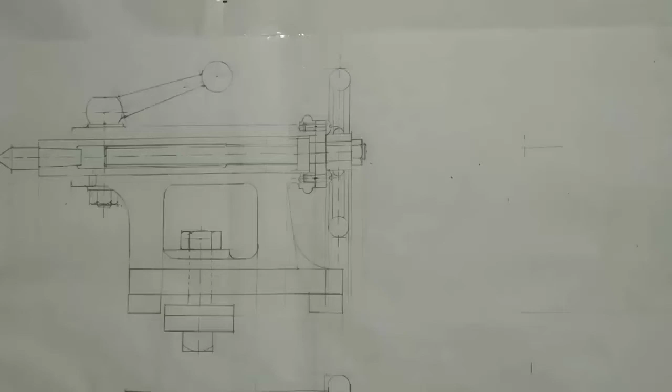Then we have to draw the side view. Extend this center line.

First we shall draw the side view of the body. You can see two circles of diameter 38 and 62. So half of 38 is 19. Look for 19 diameter circle. Here it is.

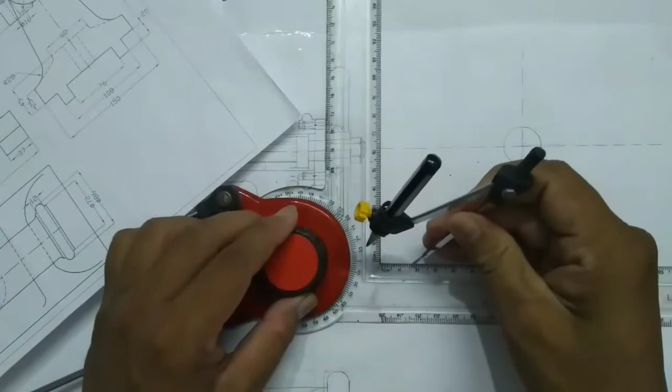Another circle is of diameter 62. So you have to draw for 31. If the diameter is 31, then radius will be 15.5. So I am measuring 15.5.

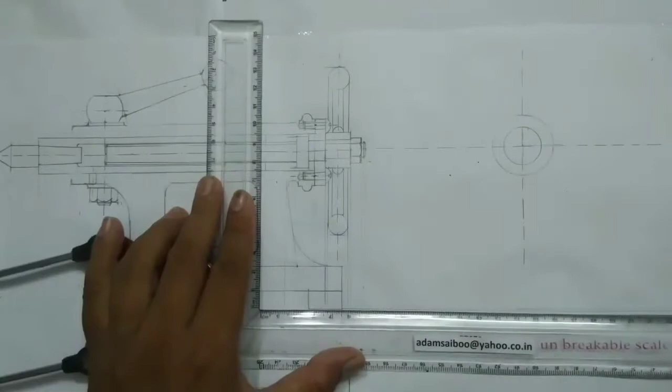Next thing we have to draw this base. Project line from the front view. This distance is 76, for us 38. If you further divide, you will get 19 mm. From here 19. From this point you mark 38 mm.

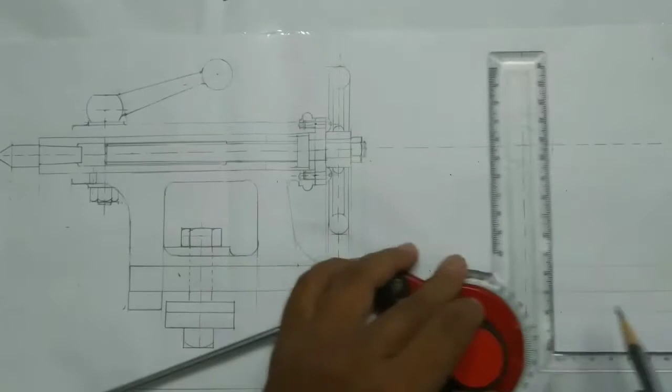And this distance, it was given 108, for us 54. If you further divide, you will get 27. So from here you mark 27. From here mark 54.

Then this distance 150, for us 75. If you divide further 37.5. From here 37.5. From this point you mark 75.

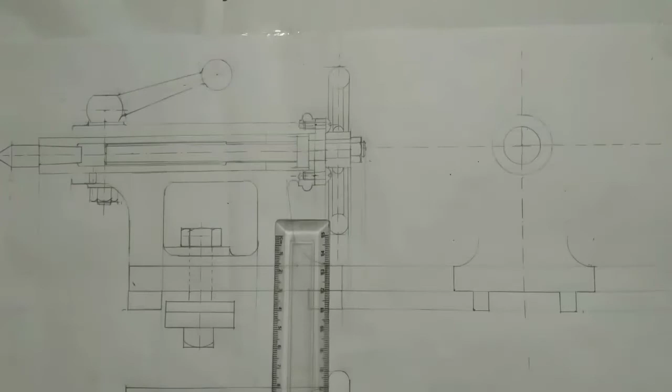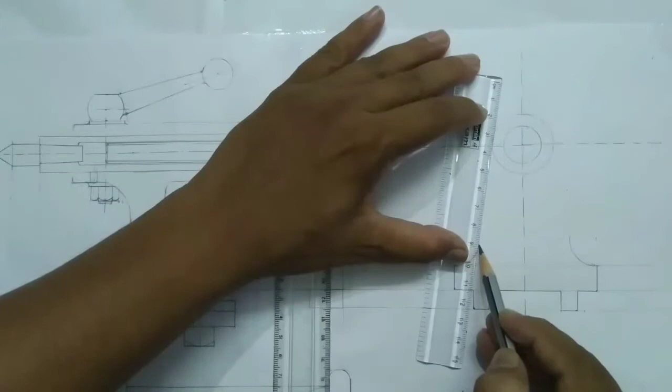Then you have to connect these two arcs using a line. It should be tangent to these two circles or arc. So you place your scale like this, just move here. When it touches the arc at this point, not at this point, at this point it is touching, it should be a tangent line. So draw a line, and also here.

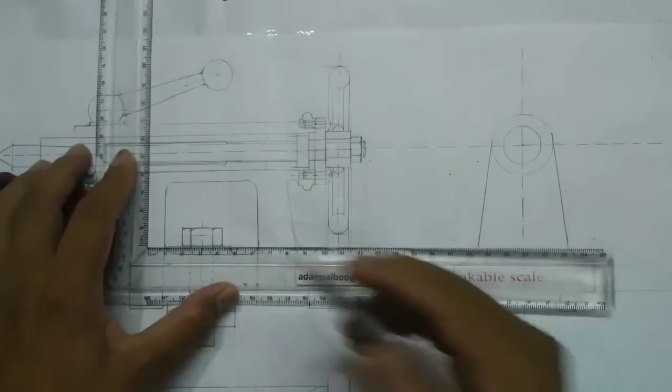So this is the tangent line. You can see the line is meeting at this point, not here. So this is the tangent point. Then you can see this line which is coming from this point. You have to project, and this point you have to draw line here. So I am projecting two lines from the front view, one from this point and another one from here.

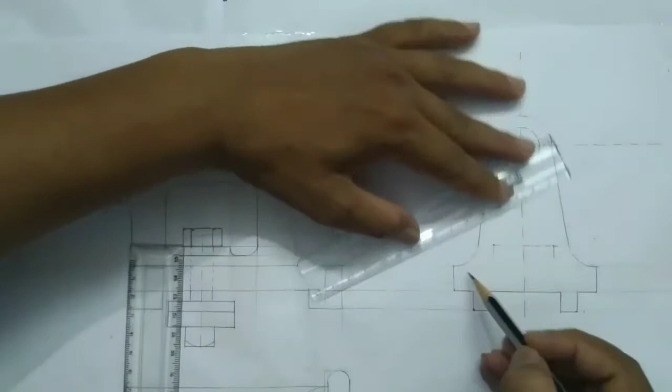You can see this distance was given 62, which should be equal to this distance 62. For us 31, if you divide 15.5, draw dashed lines. This one is also tangent to this arc, this line.

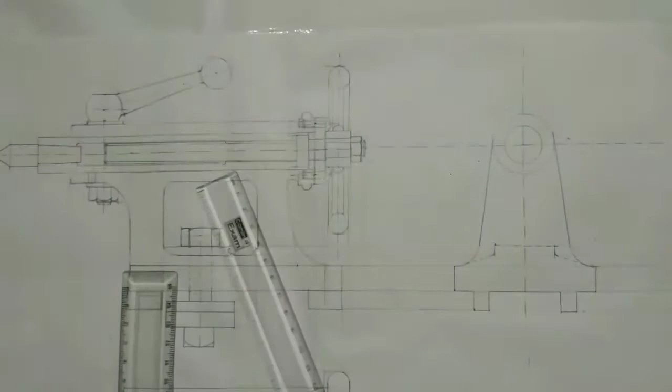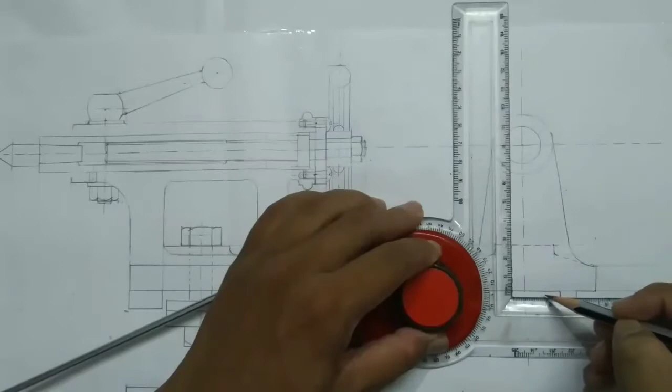Fillet this portion. I am using 6 mm diameter circle, or 5 mm. Then you can see a hole here. This one is of diameter 23. For us 11.5. Approximately this side 6 mm. So this distance should be 11.5.

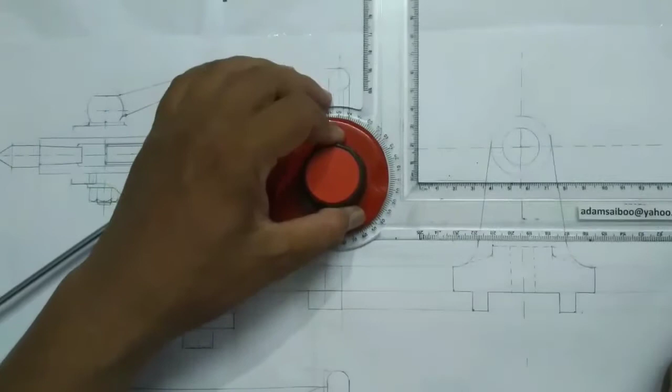Then the next thing is I have to draw this portion. This is of height 70. So from the center line you have to divide into 35, which means 17.5. Draw a rough line. From here you mark 35, draw a rough horizontal line.

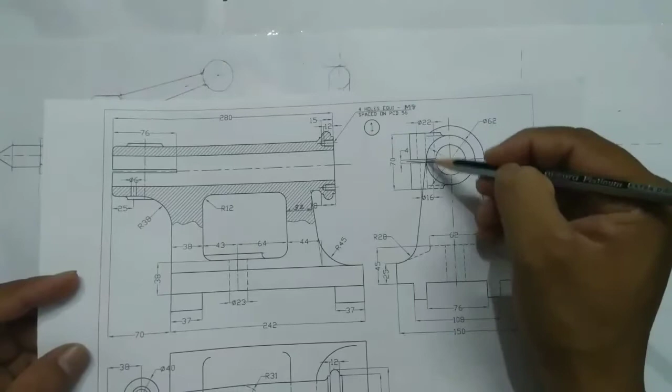Then you have to draw this center line, which will be tangent to this circle and also vertical, this center line. The next thing is I have to draw this line, which is a circle of diameter 40, for us 20. So divide 10, 10. From this point I am drawing a line of 10 mm gap.

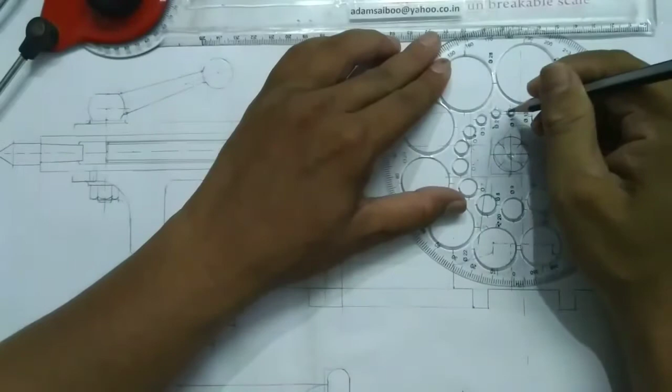Then draw horizontal line from this point up to the center line. And also you can see a small fillet here. I am using just 1 mm diameter circle. Next thing, you can see here a gap of 4 mm, for us 2, divide 1, 1.

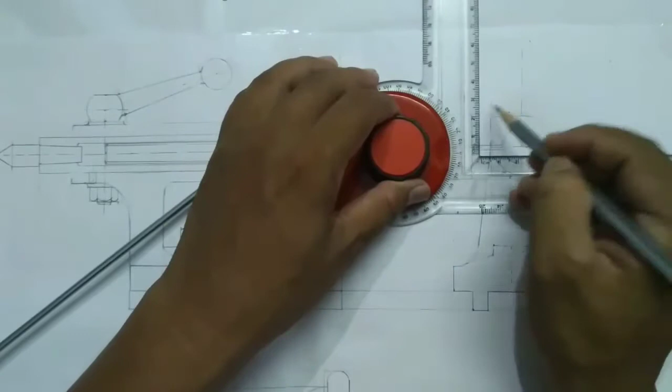And the next thing, they have drilled a hole of 22 mm diameter, which starts from here and ends here. For us 11, if you divide 5.5, 5.5. From the center line you mark 5.5 and draw a dotted line. From here you mark 11 mm.

And this side of the hole is of diameter 16. So you can see here dashed lines. 16 means 8 for us. So divide 4, 4. From this center line I am drawing a dashed line of gap 4 mm. From here you mark 8 mm.

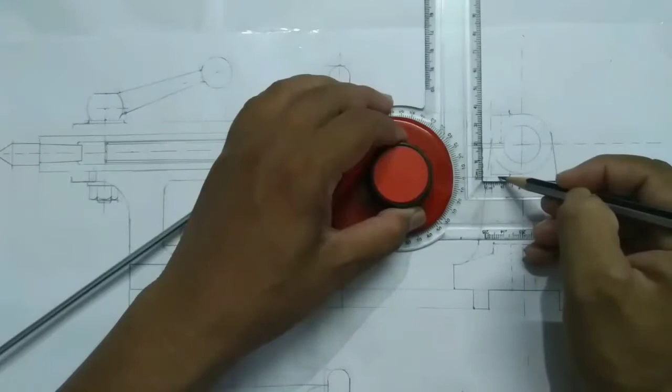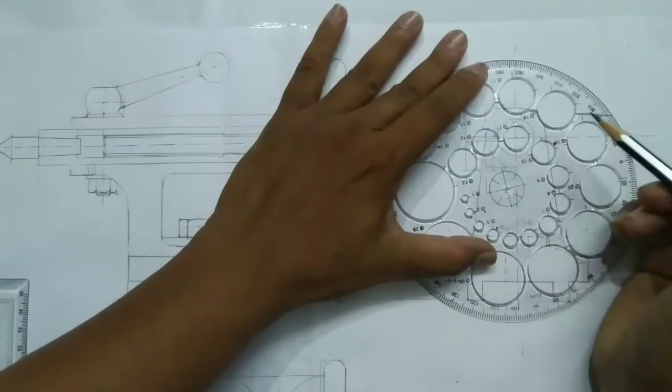Next, if you see from the side view, you can see this barrel here. So the major diameter of the barrel will coincide with this portion. I have to draw the side view of the center. So it will also be a circle. So we know that the circle diameter of the center is 22, for us 11. I am using 11 mm diameter circle. So this one is the center.

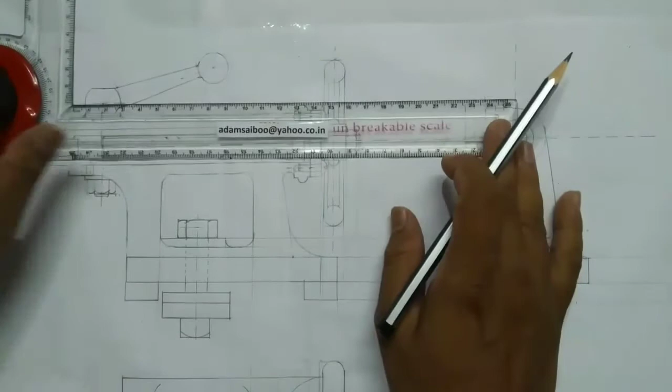Then I am going to draw this side of the handle. So I'm just projecting two lines from the center point of the circle.

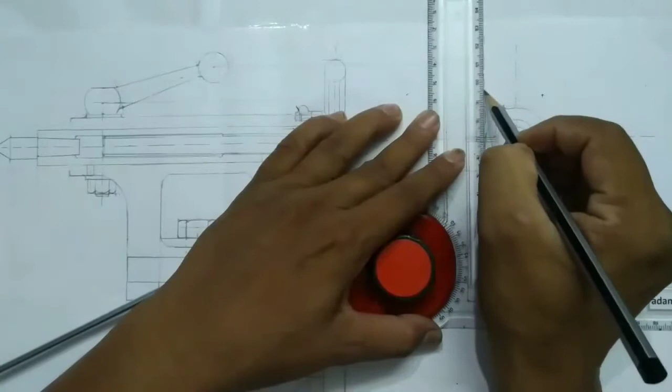Extend the center line. So this center point, we know that it is 11 mm. This distance is 11 mm. So for us it is 5.5. You just mark 5.5. So this circle diameter is 40, for us 20, and this one is 32, for us 16. Choose 20 mm diameter circle. Here it is.

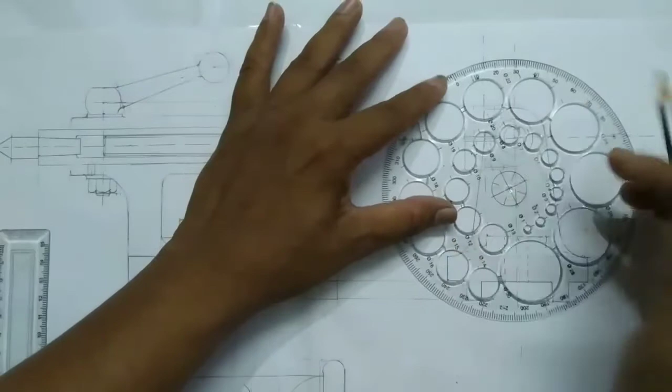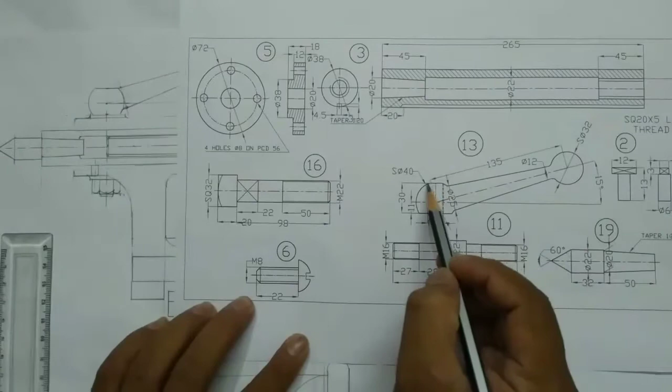Then choose 16 mm diameter circle. This one, 16 mm diameter circle. So this distance is 30. We just cut the top portion. For us 15. From here you mark 15 mm and draw a line.

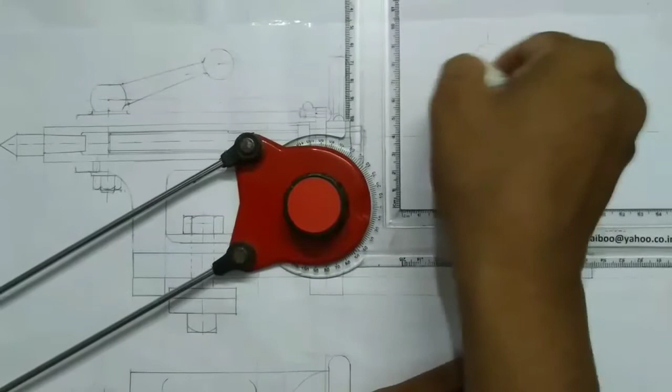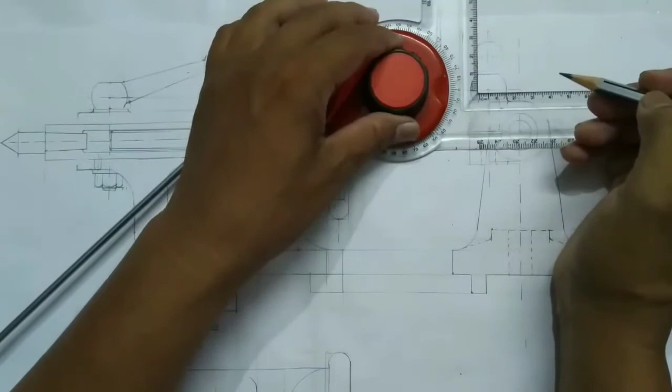Now the handle is tapered. So here the distance is given 12 mm. For us 6, so you mark 3, 3. This one 3, 3. Total 6. And here the thickness is 25. For us 12.5, so you can mark 6, 6. This total distance 12.5. Use ruler to join the line. Just fillet at the end.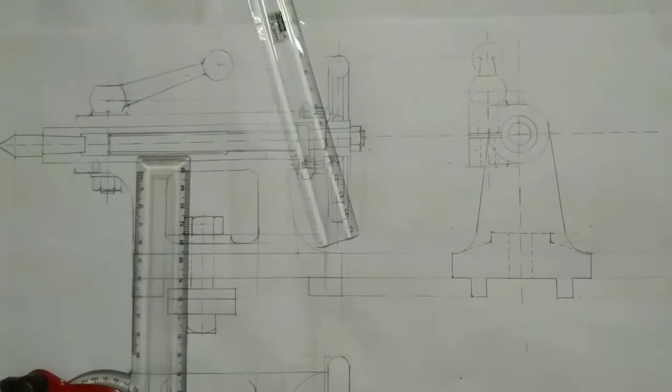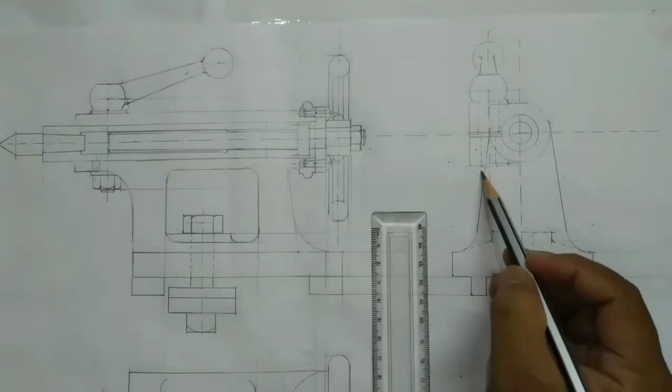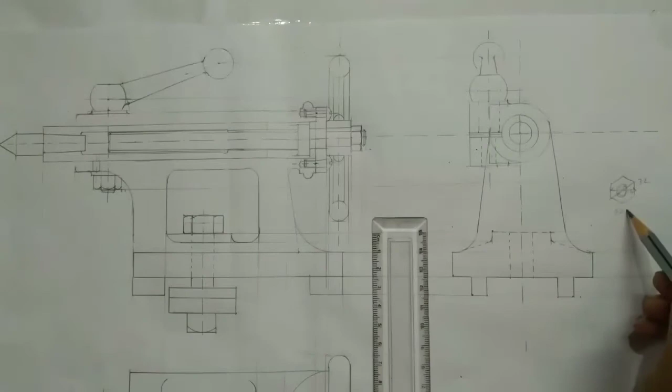Now this nut I have to draw here. Project line. It is a hexagonal nut of size M16. So M16 means this major diameter is 16. So total this distance will come around 32. Then we have to calculate this distance, which will be equal to 32 cos 30 degrees. So approximately we'll get 28 something. For us 14.

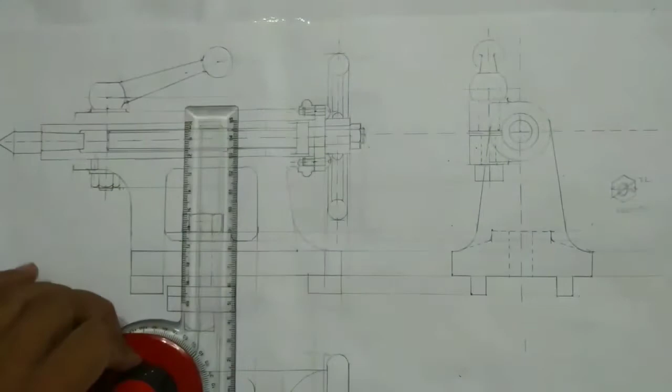I'm using a 12 mm diameter circle to chamfer the corners. Also I'm going to draw the side of the nut here. Actually it is invisible because it was hidden.

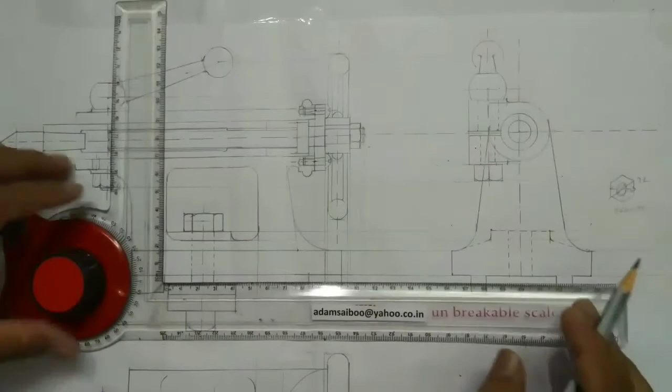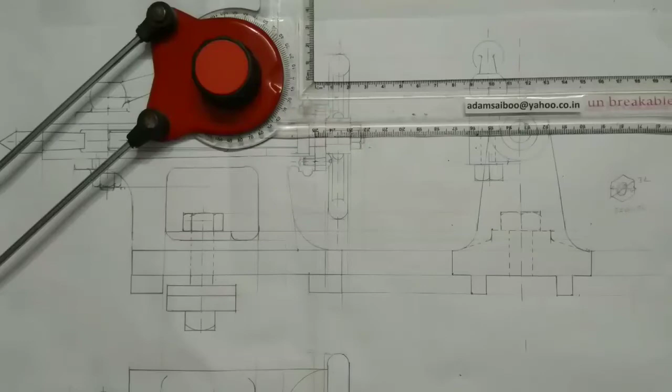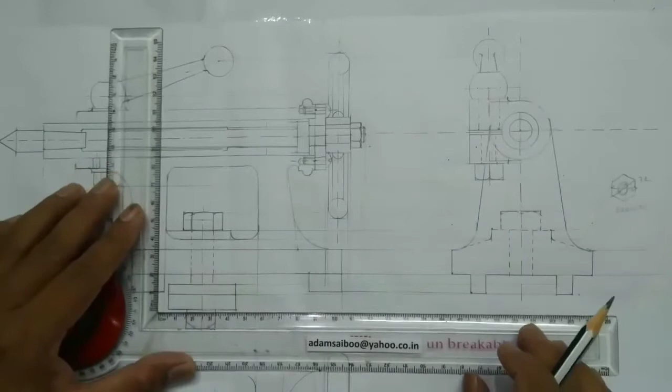Then the clamping plate. This one is a clamping plate. I have to draw the side view for this clamping plate. This distance was given 106. For us 53. 53, if you divide you will get 26.5. This portion will be hidden.

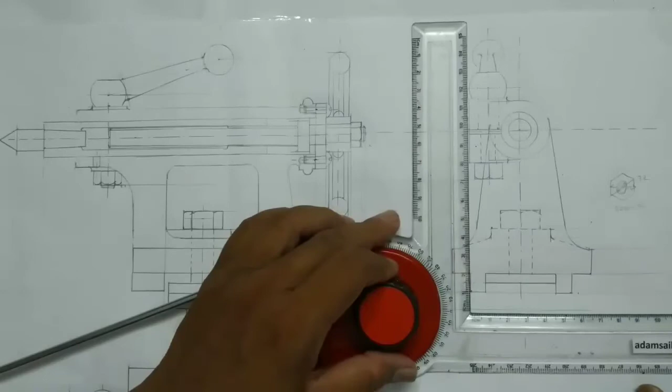And this distance was given 126. Half of this, 53. Sorry, 63. 63 if you divide, you will get 31.5. 31.5. 63. You can see a fillet here. I am using a 5 mm diameter circle.

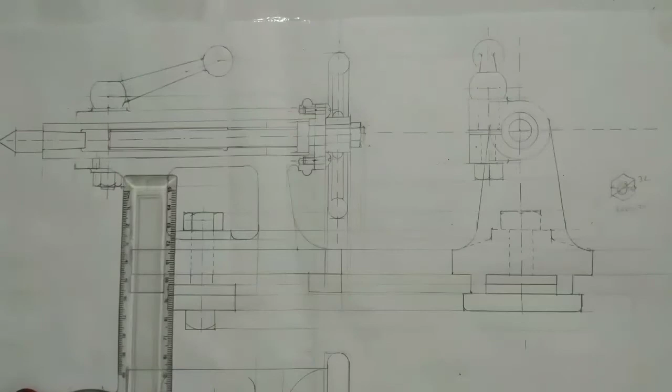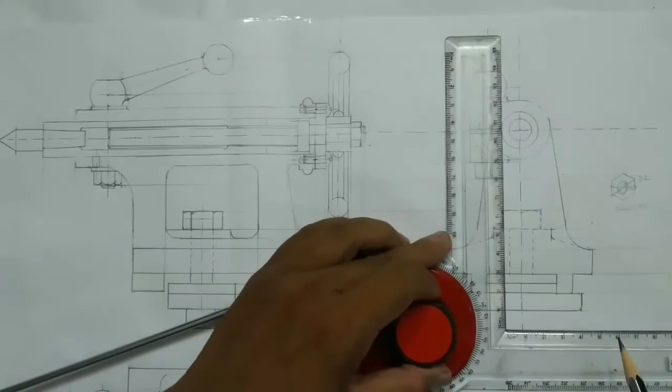Then the square head bolt. You can see the head will come here. This distance was given 20. I have projected, and this distance is 32, for us 16, divide 8. This diameter I am choosing randomly.

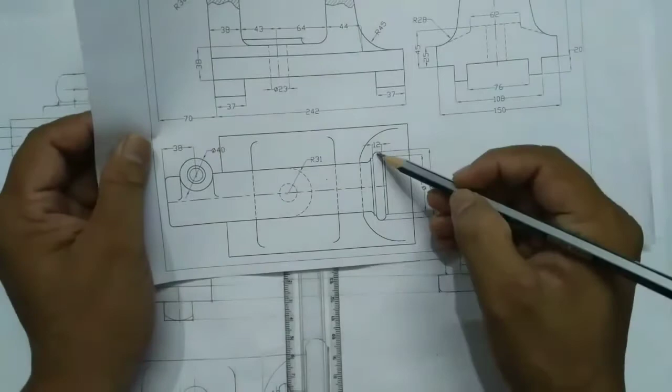And another thing is, you can see here a small projection. This will come here as a circle. So here you can see this distance was given 86. For us it is 43. If you further divide by 2, you will get 21.5. Only this portion you can see. The remaining thing will be hidden.

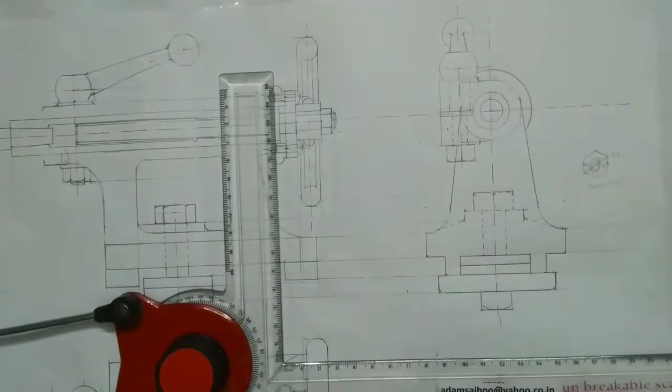And finally we have to draw this side of the handle. Here you can see the handle. This major diameter is 185, for us 92.5. If you divide 92.5, you will get approximately 46 mm.

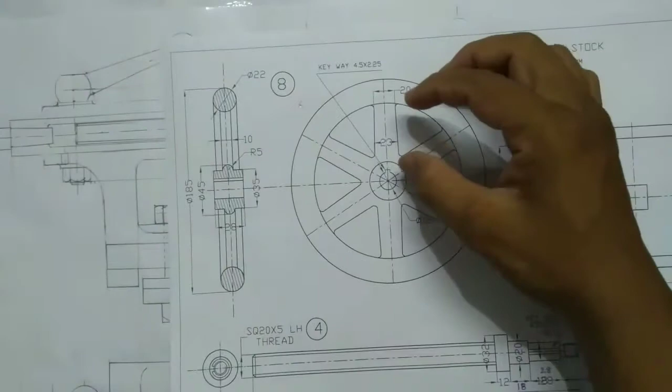Then what will be the diameter of this inner circle? It will be equal to the distance from this center line to this point. So I have to measure this distance in this front view, and then I am going to draw the circle.

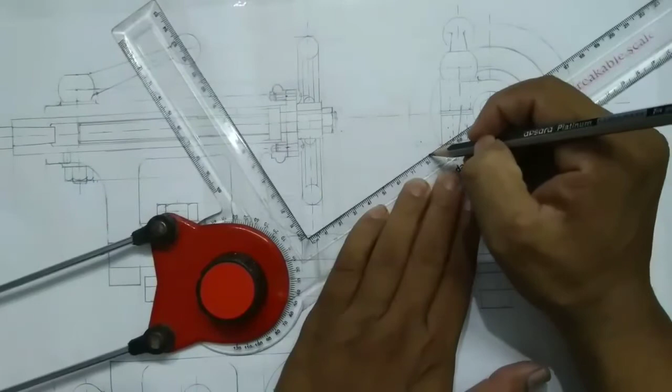Next thing, here you can see you are having 6 spokes, each spaced at an angle of 60 degrees. So this angle is 60 degrees. So I'll tilt the drafter to 30 degrees. Because if this angle is 60, then the angle between the horizontal line and this center line will be 30 degrees. Then again turn your drafter 30 degrees in the opposite direction, clockwise.

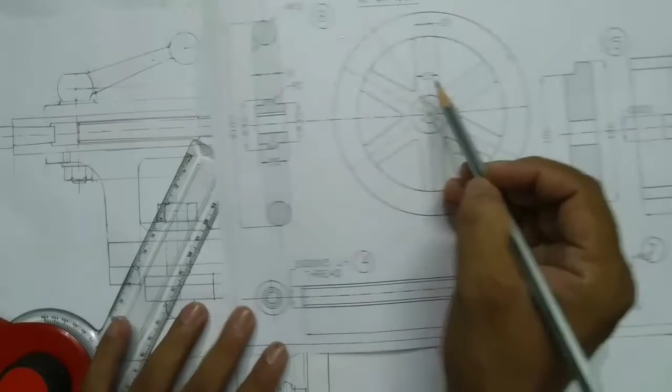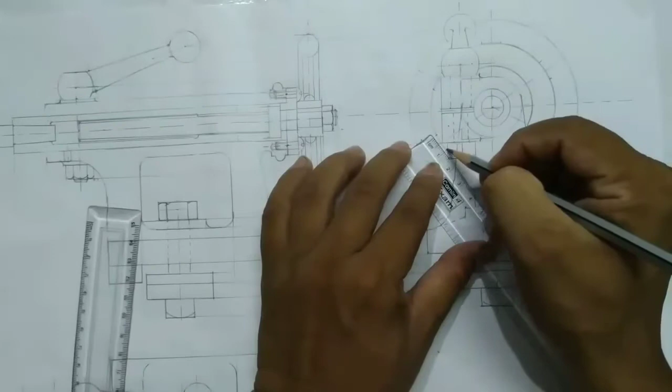Then here these lines are tapered lines, so you can see this distance is 20 and this one 23. So this distance will approximately coincide here. So you have to project a line from this point and then you can mark 23. So 20 means for us 10, you divide into 5, 5. Similarly here. You can draw the line; before that, project this point.

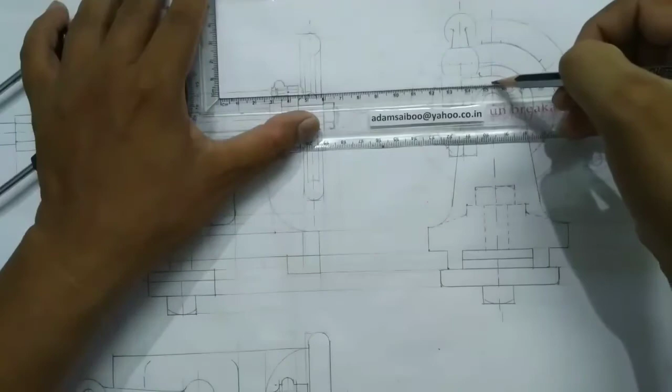So measure this distance. It's coming around 14. Use 14, means a 28 mm diameter circle. Draw this circle very light, because this one is a construction circle. Now I am going to mark this distance 23. For us it is 11.5. So this distance should be 11.5.

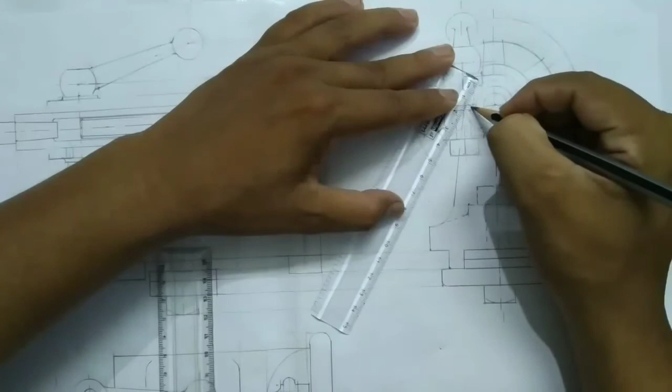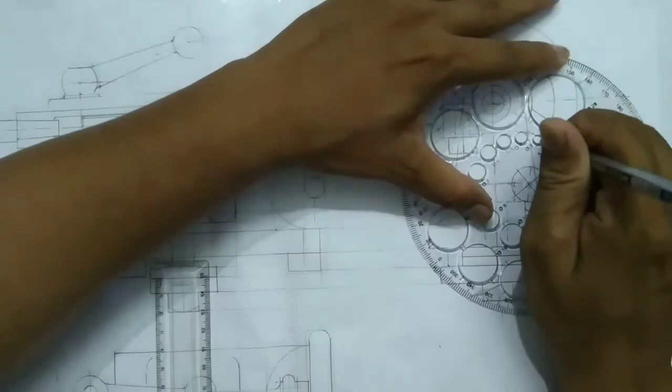Just to fillet this, I am using a 3 mm diameter circle. That's all. Our side view is over.

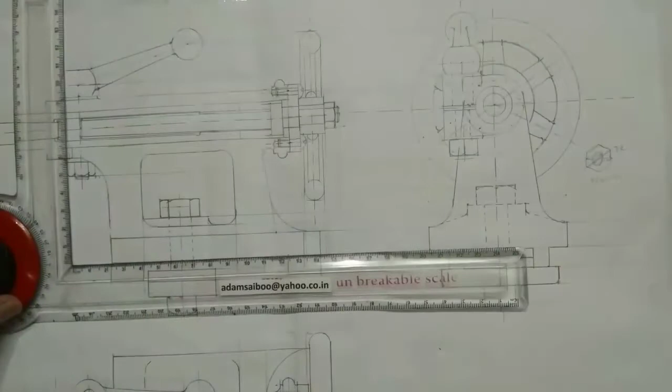Next thing is the stud. A small projection of the stud will be visible here also. So for that I am projecting a line from the front view, small portion. You can see the diameter of the stud is 16 mm major diameter. For us 8, we divide into 4, 4.

And another thing we missed here is, you can see in the barrel a small slot here that we forgot to draw, which is 20 mm from here. For us 10. So this gap is 3 and this distance is 3 mm. So for us 1.5.

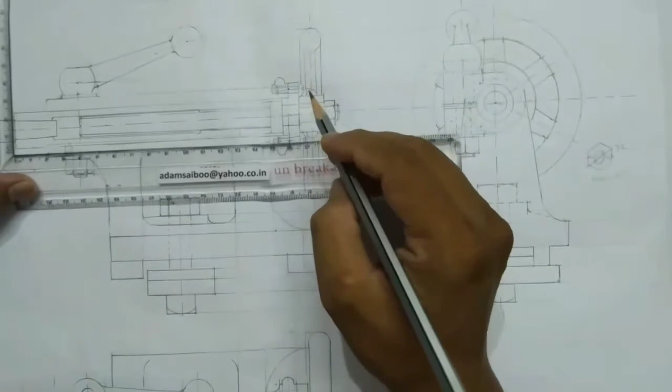And you can see here a small object of T shape. It's called a feather. This one will come here, which will prevent the rotation of the barrel while rotating this screw. So this is of size total height 13. So this distance will be 10.

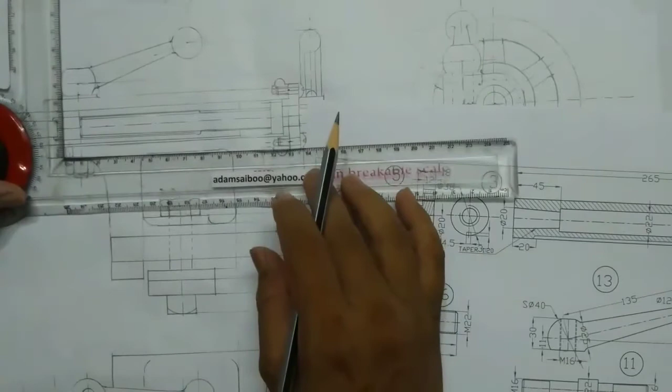So approximately we are getting the same distance. 10 means we have to draw for 5 mm. So that will occupy this portion. So this rectangle we have already drawn here. Only we have to mark this distance 12 mm. For us 6, split into 3, 3.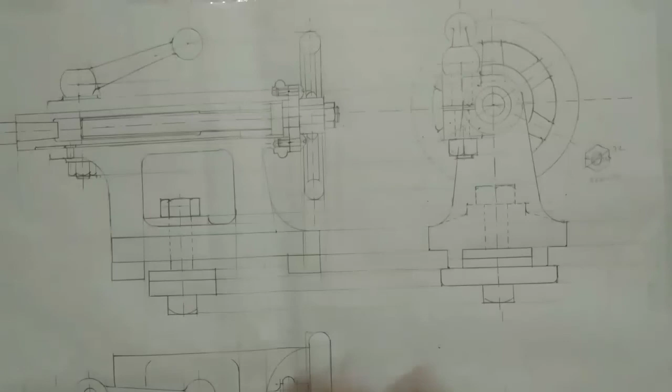So that's all. I think we have completed the drawing, front view, top view and side view. Finally, you have to hatch here, section the view. Do not section everything. You show this local section here because this portion is so complicated. Many more parts are assembled here. So in order to see clearly, we have to section only this portion.

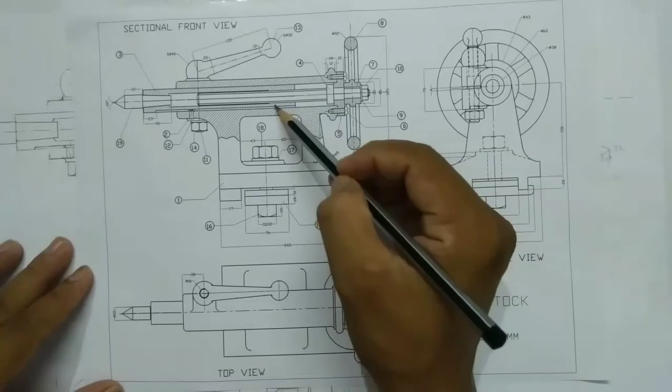So this is the final view of the drawing. Front view, top view, side view. You can see here the parts are mentioned and also dimensioned properly. While hatching, you have to change the angle for different components. You can see this portion is hatched like this in 45 degrees, and this one is hatched in the opposite direction of 45 degrees, like that. No need to section this part center like this.

And also you have to see that these screws are not sectioned, and the nut. These are the conventional way of representing the drawing.